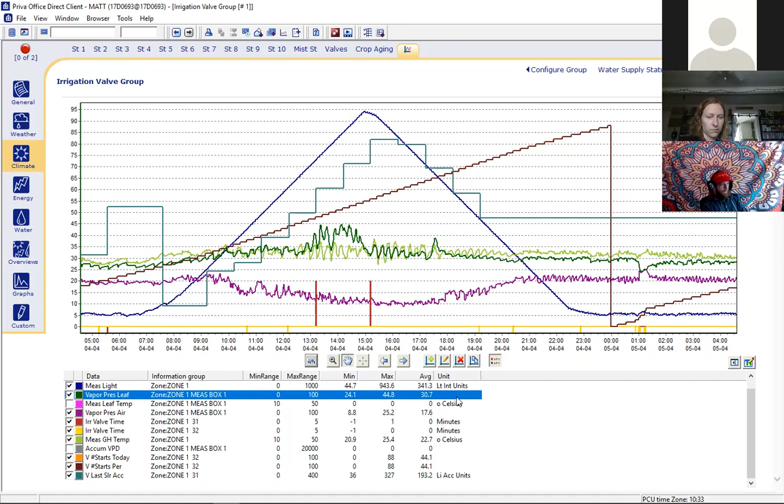Sure, okay. And here we're looking at, it doesn't say the unit on this, but it's millibars. It's a pressure. Okay. Measured greenhouse temperature would be in degrees Celsius. Okay, so the units up the y-axis is whatever we have highlighted on the graph.

Is there any way to change that? Pardon me? Is there any way to change that? Like, say I didn't want watts per meter squared, could I put it in PPF or something like that? No. Let me have a look here. Your weather sensor. So sunlight, solar sensor. Here, so we only have a certain amount of solar sensor types that we can set on the Priva system and on the weather station.

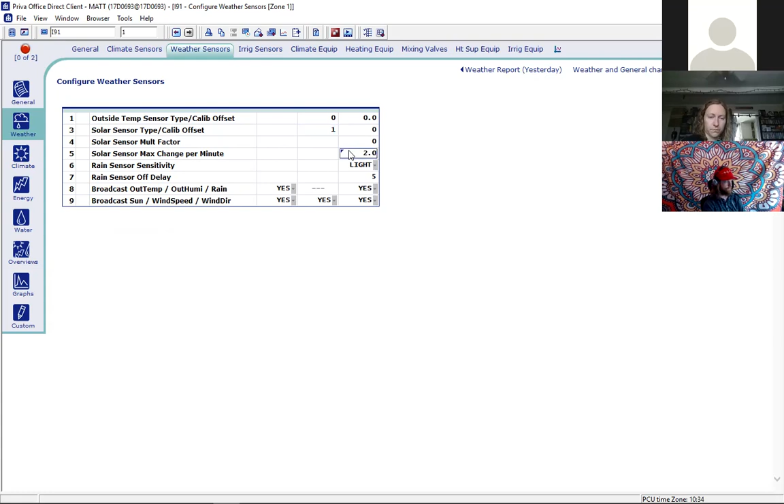The global or pyranometer is in watts per meter squared. There's a PAR sensor, which measures light in again, watts per meter squared, but in the PAR range, right? And there's a linear sensor, which will measure lux or lumens. Okay, that all makes sense. Thanks, Matt. Yeah, no problem.

Converting light units is not an easy thing. There's a lot of stuff on the web that will give you that information, but it's not very translatable. I don't even know what to equate it to. It doesn't translate very well. You can't convert it like a centimeter to inches. It's not as easy as that. It's kind of like French to English. When you're speaking direct English to French, it has a different meaning. The light units don't translate exactly the same.

But anyway, light units. So y-axis is whatever we have highlighted in the legend down here. Okay, the x-axis is always in time, and we change that time period with this little equalizer button down here, just to kind of go over and review that. We can change the interval type from hours to days to months to years. We can change the start time from when you want the graph to start reading and end.

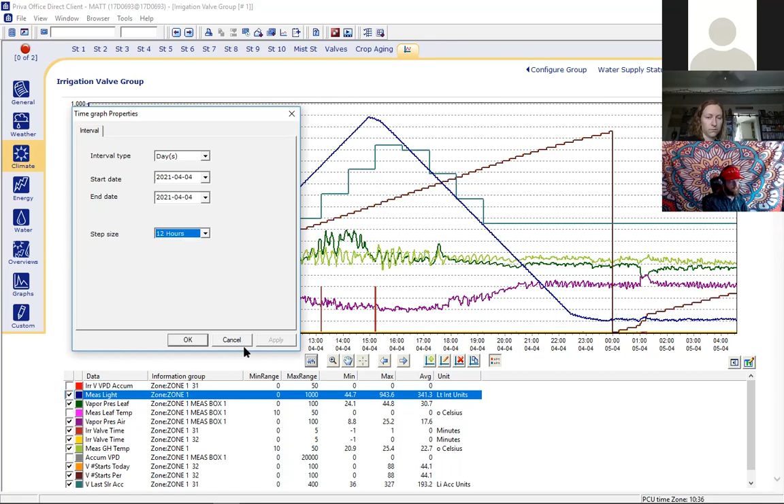You can have start dates and end dates, and we can have step sizes, which means this arrow here would push that graph forward in the amount of hours or days or weeks that you have set to move forward on. Okay, so that's how you manipulate the graph.

If we wanted to change or add any readings or status lines, we would click this plus button, and we can have a look at the amount of starts per day, the amount of starts per period. So these are all irrigation valve settings. We can look at just about anything, right? Anything that's traceable and any data that we track. A lot of stuff there.

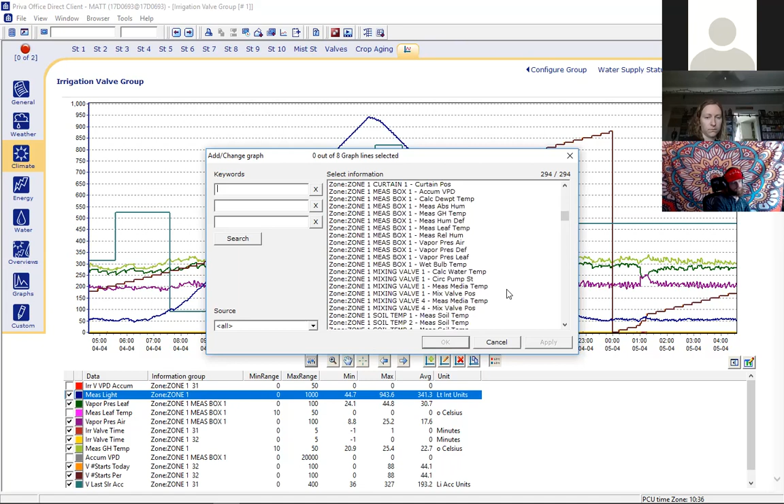Okay. Again, any questions on the graphs that you see here? Any questions on how to read the graphs? Translating information, usable information. Is there anything here that you question why we use graphs or how would we use this irrigation graph? You guys are all good. Okay, we'll move on then. All right.

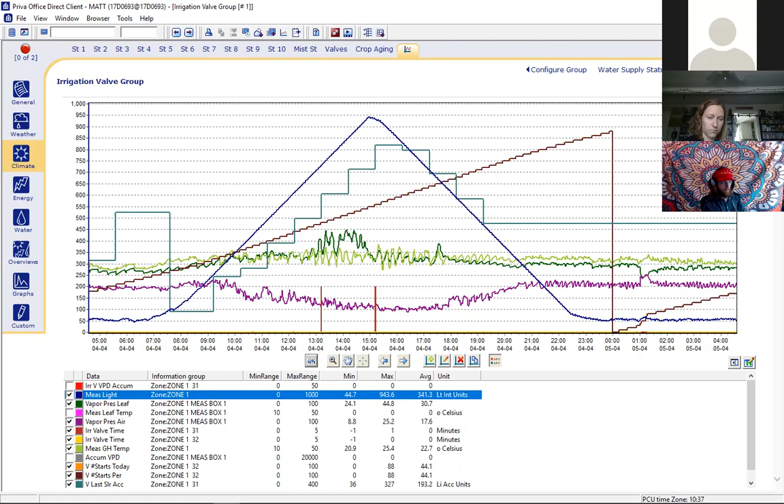Maybe we'll look at, let's look at the compass graph to see how different that is. I think I'm sharing. I wish Zoom would highlight the screen that I'm sharing. You guys are seeing the Priva operator now? Yeah. Thanks. So anyway, here's the graph that the Priva operator has in comparison.

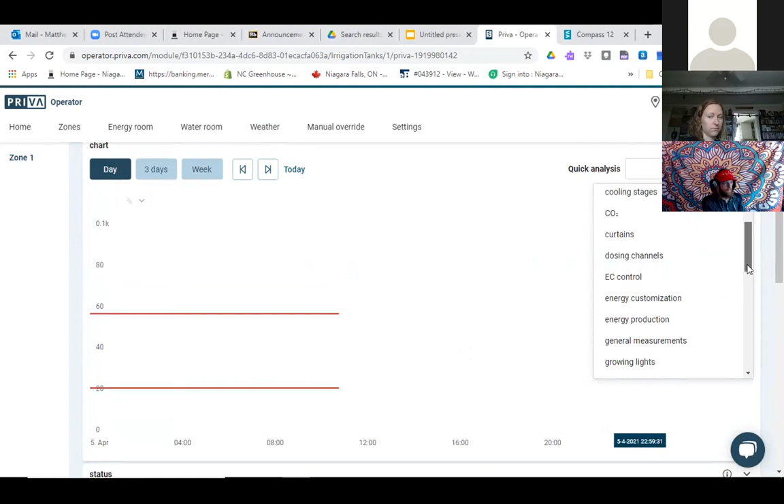Not as easy to manipulate, in my opinion. Let's look at... So it does track everything we need to. It's just not as easy to manipulate as the Priva Office Direct. I guess these are all...

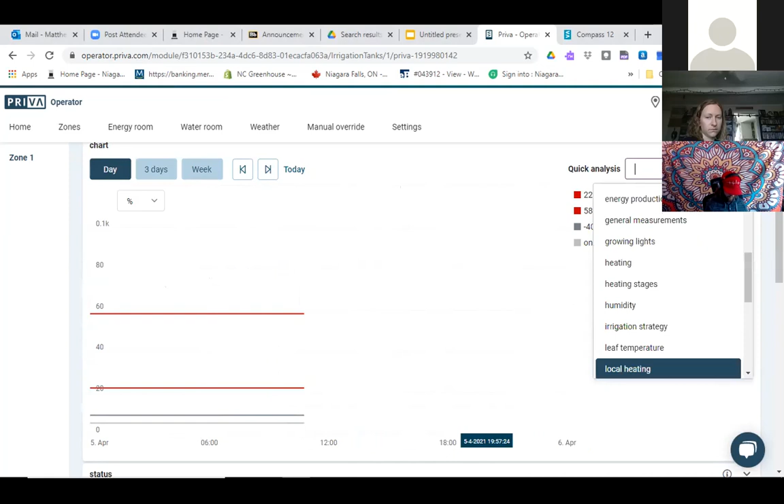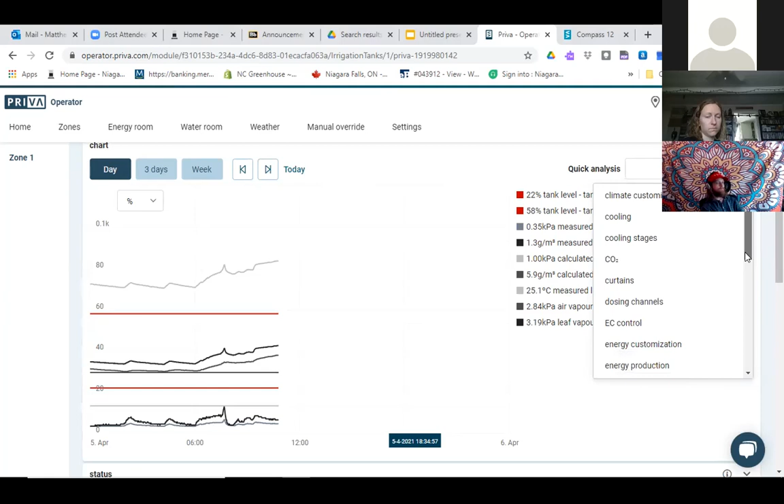I see how this works. So every drop down must have been pre-coded. Every drop down title down here has a collection of data points that it's tracking within the system. You must be able to set that somehow, and I really don't know.

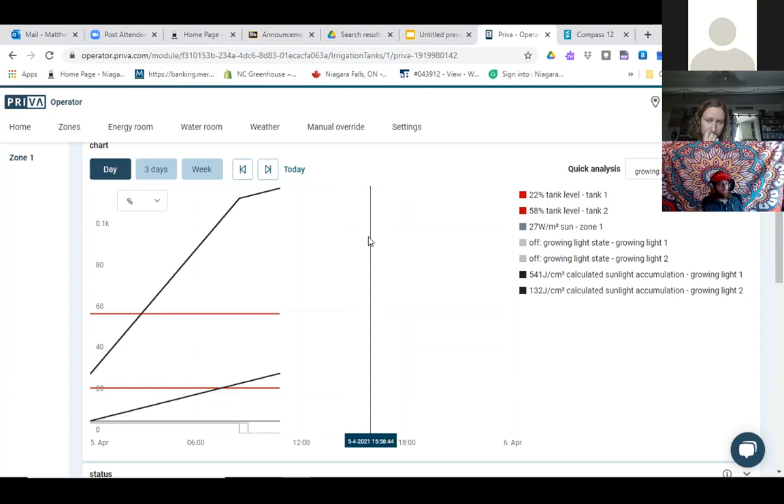So let's go over settings before I ramble on too much and put you guys off. So irrigation settings, we'll look at the Priva operator. It's all fairly similar to your climate settings. You have different strategies that you can choose from. Conditional means that you have triggers that you'll set up throughout the day, such as sunlight, humidity, VPD, wind, whatever.

We have daily, which is regardless of how sunny it is or any of the climate conditions, it's going to go off on a cycle that you tell it to. So you can have up to 30 cycles or 30 irrigation starts throughout the day. That's programmed daily. You can have multi-day. Instead of having Monday, Tuesday, Wednesday, days of the week, you can have your days set up, so every third day or so, you can have an irrigation start.

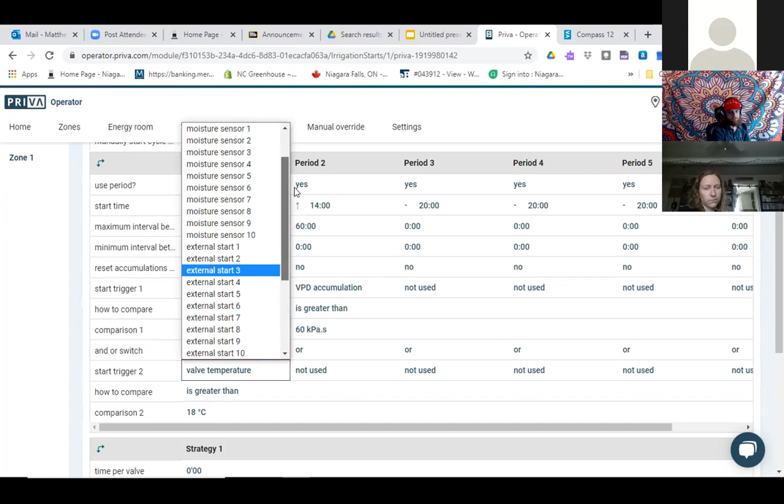Sunlight accumulation. Okay. So if we have our 1600 joules per centimeter squared, so when the sensor accumulates that much sunlight, irrigation start will happen, as long as we're within that 10-minute time frame. At 2 o'clock, that accumulation will reset and it'll start back down to 0.

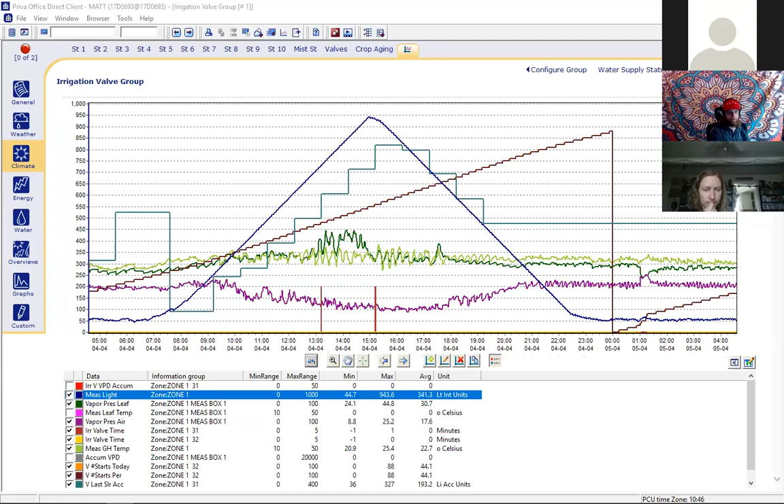Right? So when we look at our graph, it would look something like, talking heads, it'll look something like this, right? So our accumulation happens, our irrigation start, and then it drops, it resets. And then it goes back up again, and then it resets.

I want to confuse myself there.

So start triggers. This is why we want our irrigation to start. Okay, sunlight intensity. So we have 350 watts per meter squared. This sensor is more than likely on our weather station. So it's the amount of energy coming in. That's the sunlight intensity, right? Sunlight accumulation. So how much sunlight do we accumulate before the irrigation starts? VPD accumulation.

Moisture sensors. We can have moisture sensors throughout the crop. We do have one on the prop bench. It looks like a leaf, and basically it measures the resistance across that sensor, which when it's wet, the resistance is less. All of these sensors are based on electricity, so moisture sensors anyway.

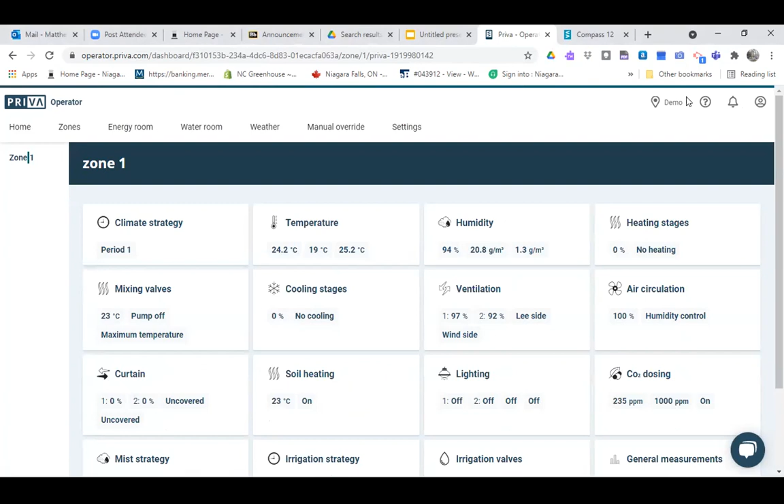Oops. Sorry. I froze it. Unbelievable. Technology, it's a beautiful thing. There we go. What the hell? It's not working. Unbelievable. We try it one more time. Yeah, we'll take a little bit of a right turn here.

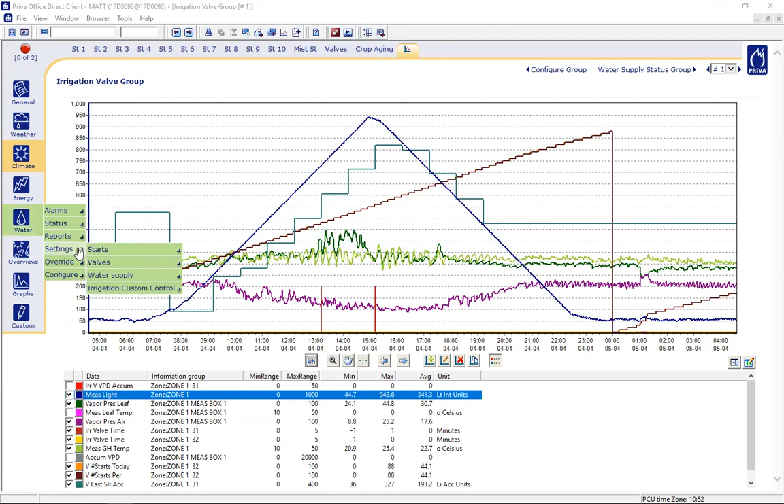It'll fall back. So anyway, we'll use the Priva Office Direct. So, settings, irrigation start one. I kind of like this program a little better because it's easier to jump back and forth. So my irrigation start times or start reasons or triggers, they're all in kind of one little area here. I guess I'm a little more used to it. But anyway, the same thing here. You can see all the same triggers you're able to use. It's identical, right?

So if light intensity is greater than 250 watts per meter squared, then our irrigation will go off every 60 minutes. So this is our actual settings in zone 1. At 6 a.m., every day, because I don't have it following sunrise, irrigation is going to be between 6 a.m. and 8 p.m.

Every hour, irrigation is going to go off for 20 seconds if these two conditions are met. If these two conditions are not met, then it'll be every 2 hours for 20 seconds. So I have the conditions as light intensity is greater than 250 watts per meter squared, and our valve temperature, which is the greenhouse temperature, is greater than 18 degrees.

Okay, so if one of these conditions are not met, the irrigation will be the maximum interval for 2 hours. If both of these conditions are met, then it'll go off every 60 minutes. Right? If I wanted one or the other, I can do that as well. So, and/or switch. It can be one or the other, or it has to be both. Okay, so you can latch them together.

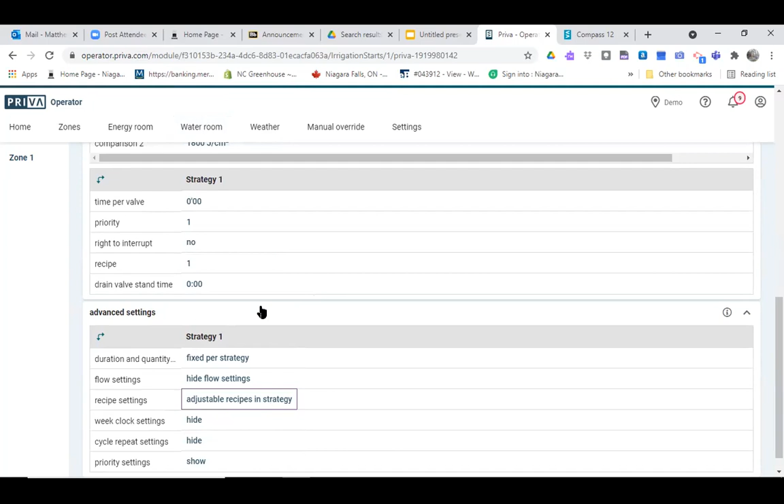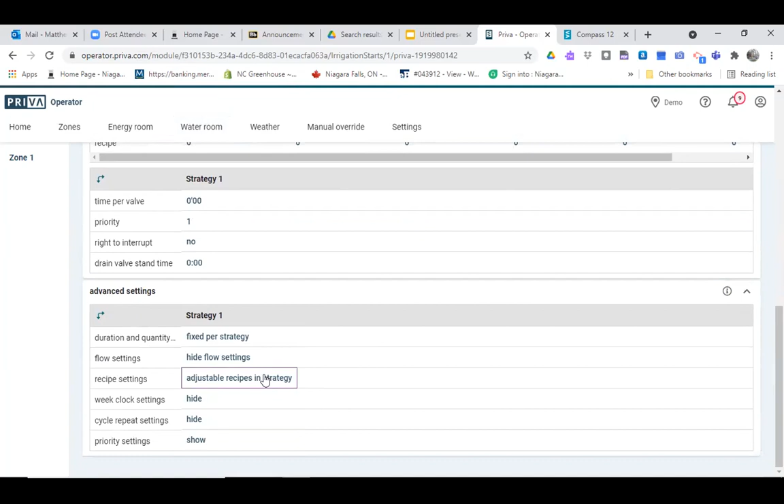There you go. The different strategies throughout the day. Okay, so like I said, as these programs evolve, we'll just have different toggles. It's not that the Priva operator can't do this, it's just a little more cumbersome. So there's just different triggers or different selections in the Priva operator, and that's what I mean by whatever you're comfortable with. All systems are very similar in what they do. It's just how you find the settings.

All right, so that's how you set up irrigation, right? So when you start a job, if you're ever able to use the computer control system, this is more than likely where you're going to spend a lot of your time when you're looking at irrigation. You're going to look at time between irrigation starts. You're going to look at irrigation triggers. And you're going to look at length of time that you want your irrigation to turn on.

These are things that I change on a regular basis. I changed them actually today on the prop bench. You notice things are too dry or too wet, you're going to make adjustments as you go. Okay, any questions on how to set up your valves? This is a specific valve within the greenhouse that you're setting up.

Nothing? You guys are all good with that? So you're saying you can walk into a greenhouse and set up some irrigation. I love it. Or at least be familiar and muddle your way through it, like we all do for everything we start with. It is pretty straightforward until you start looking at the screen. Cool.

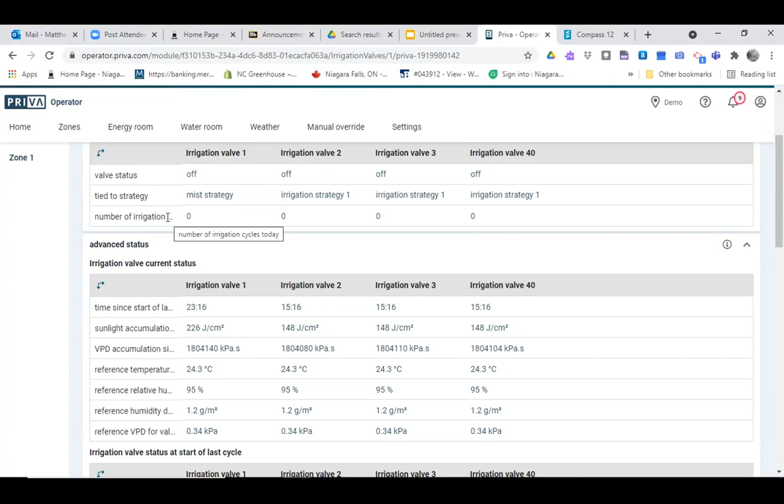So irrigation valve, for instance, is off. We're not irrigating. It's tied to a mist strategy, which is cooling the greenhouse or adding humidity to the greenhouse itself. Number of irrigation starts per period or cycles today, we have none. Time since last start, what the sunlight accumulation is. So these are all status. So this is what's happening with that valve, right? Walk through. It's kind of like looking at a graph, but one part of it.

Let's look at settings. So irrigation valve, we can have different strategies attached to these valves. If you don't want to use it, just leave it alone, no strategy. I have irrigation strategy 1. If we go back to the other page that we were on, that's what that means. So we were setting up that strategy. I don't know if we can use these anymore, these words. So slaves to irrigation valve, this valve is a slave to whatever. So if we wanted to be valve 2, then valve 2 would be controlling valve 1, if that makes any sense.

Right, so this is a way that we can reduce the amount of outputs in our motherboard, in our computer. Large greenhouses will have multiple solenoid valves or multiple irrigation valves in their greenhouse. You have a 100,000 square foot greenhouse. You're going to have 100 different bays, right? And each bay is going to have a solenoid, and likely you're going to have similar crops within that space, which you'll want these crops to be irrigated in a similar fashion.

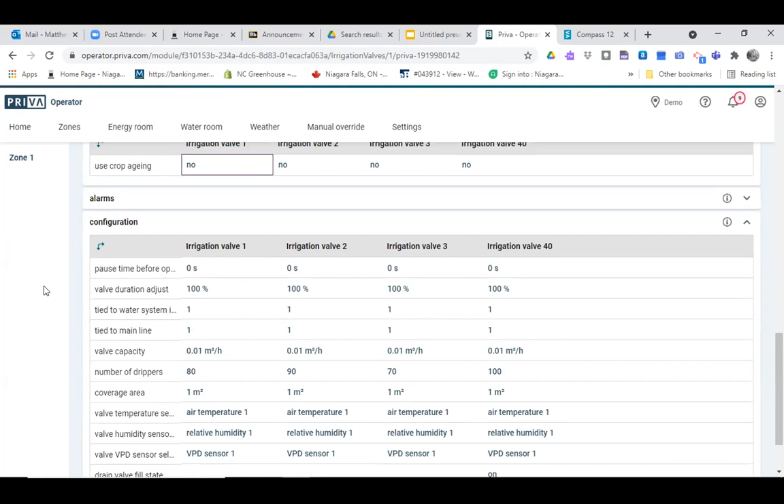So here's a few ways to manipulate your irrigation valves depending on what they are used for, right? So pause time before, so this is how to manipulate your equipment a little bit here. So each solenoid valve, you know, I assume you guys know how solenoid valves work. Your, what is that, greenhouse technical? You guys know how solenoid valves work? Chad knows. You guys comfortable with how solenoids work? They basically work on water pressure, right?

So anyway, if it takes a couple of seconds for your solenoid valve to turn on or off, you can set this time up here, right? So if it takes like 2 seconds, 3 seconds, 4 seconds, you can pause your irrigation time to kind of reset your solenoid valve.

Valve duration adjustment. So if you look back, your set point for your valve time is 1 minute. So your valve duration adjustment is 100%. It's going to go off for 1 minute. If I put this for, I'm going to keep it easy for me, 50%, that irrigation time is now adjusted down to 30 seconds. All right. So you might use this if you don't want to change your valve time on because it's tied to something else. You can adjust your duration.

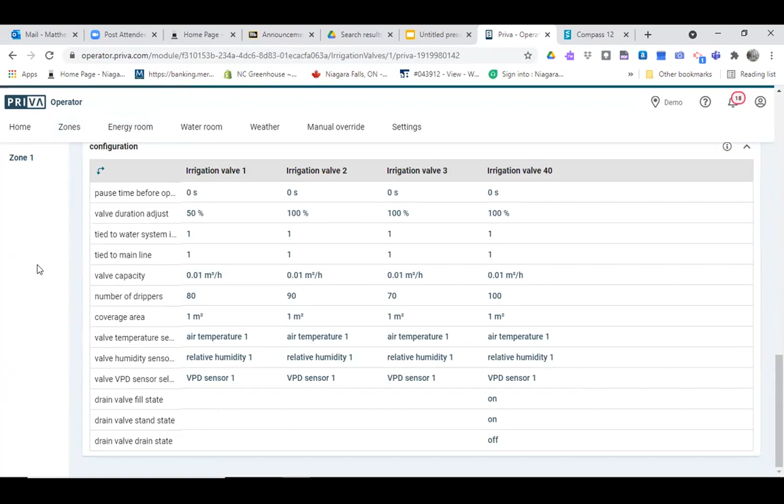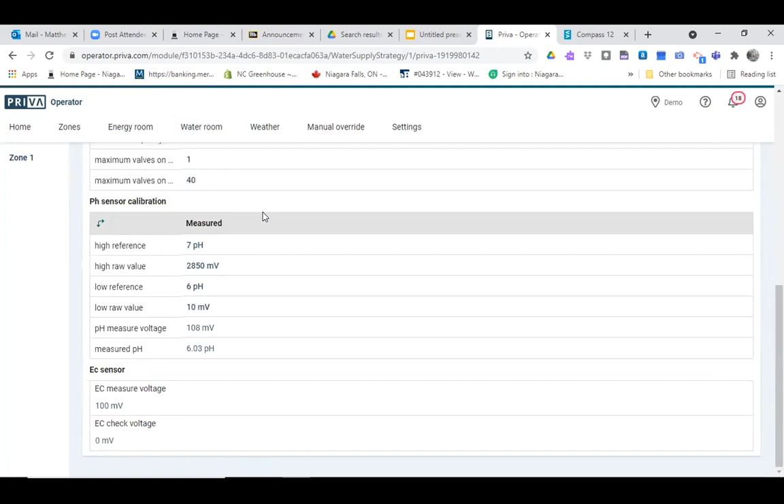So that is your irrigation configuration. All of that is your zone configuration, your valve configuration. That's how you set up your irrigation in your zones. Now we look at watering systems. And this is basically how you fill your tanks. Your water system is where you're getting your water from, so your tanks or your pressurized systems. Again, this is stuff that you'll probably configure once, so I'm not going to get into too much depth into configuration and settings for these tanks.

What we can look at is recipes and specific tanks. So your status: here's your pH and EC in that specific nutrient tank or watering system. In order to get an accurate reading, you really have to have moving water through your pipes, so you're going to have a loop of some sort. For those who have been in the cucumber house, believe it or not, we do have an EC pH loop just underneath the Dosatrons. It only works if the water is running, so it doesn't work all the time. Otherwise it's just measuring resting pH and EC, which could climb pretty high.

So anyway, here's where you set your recipes in your tanks. Your desired EC and your desired pH levels you set here. The sun intensity is a little tweak from the Priva Operator, which doesn't have this; there you basically set your desired EC and pH and you're good to go. In this setting for this tank, we have low sun intensity and high sun intensity. So say my desired EC in general is 2 millisiemens per centimeter.

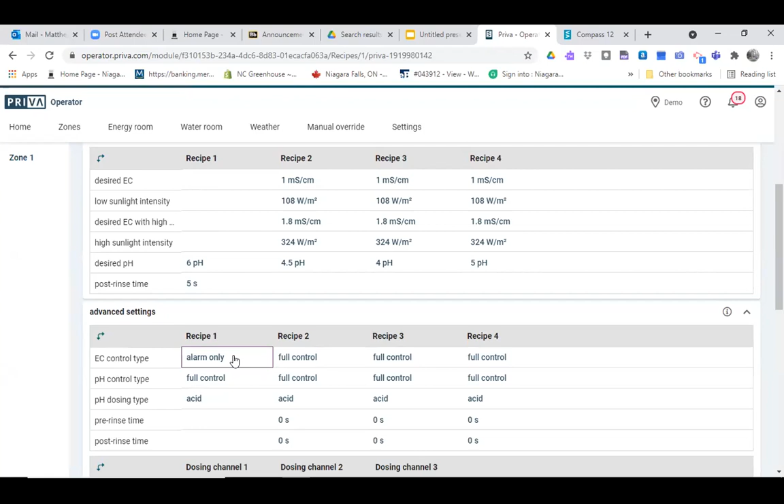Advanced settings, so we're looking at EC, full control. You'll more than likely keep it at full control. No control, so we don't have any EC or pH. Alarm only, so only if our EC is out of whack, we'll control that. So we want full control. We're going to keep that in full control.

pH dosing type. If we have acidic water, you can add bicarbonate. But we do not. We have high calcium in our water, so we have lots of bicarbonate. So we want to add acid to our system. Most places will. There are, like if you're getting water from a well, for instance... won't let me. Anyway, whatever.

So we can change our pH dosing type from acid to bicarbonate. Again, we can add another pre-rinse and a post-rinse. Use channel with recipe 1. So dosing channels.

Hey. Have you heard from Mike at all? Do you know exactly what he's doing? I don't know what Mike's doing. Neither does my class. You guys know what Mike's doing?

So dosing channels. You know, where do we want the fertilizer to come from? Do we have different types of fertilizer going into the system? This is where we can change that. So 100% nitrogen or 50% phosphorus. You know, whatever channels we have, we can pull from different tanks. All right.

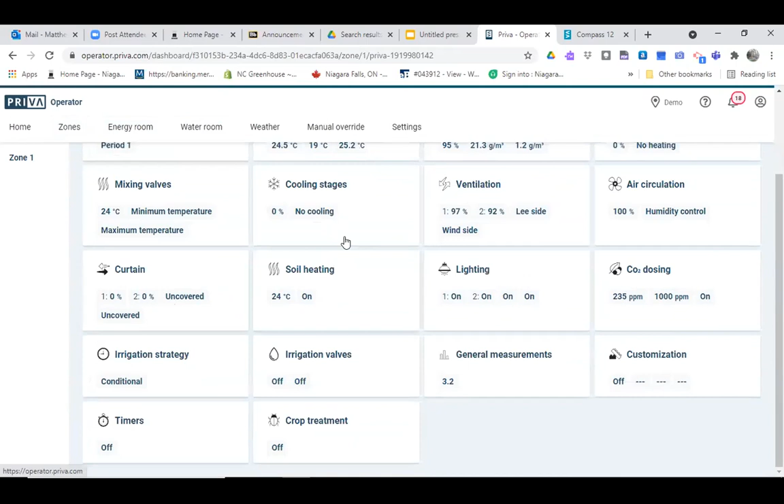Okay, lots to think about, lots to set up. But again, most of your time is going to be spent setting up the irrigation valves and your irrigation strategy. Again, some of your time is going to be spent setting up your nutrient recipes, and you're going to be tinkering with this on a regular basis, right? So I would suggest to get familiar with your nutrient recipes and your irrigation valves for irrigation settings.

Cool. I don't know what else to talk about with this. Is there anything else you guys want to go over? Are there any other questions you might have with irrigation? Is it what you were expecting? Is it like, wow, that's way more simple than I thought?

Would we be able to see, could you show us what adjustments you made in the prop house this morning and why you made them? Absolutely. Do that. Pretty cool. Thank you. Okay, so you guys can see the Priva office client now, I assume. If not, get on there and yell at me.

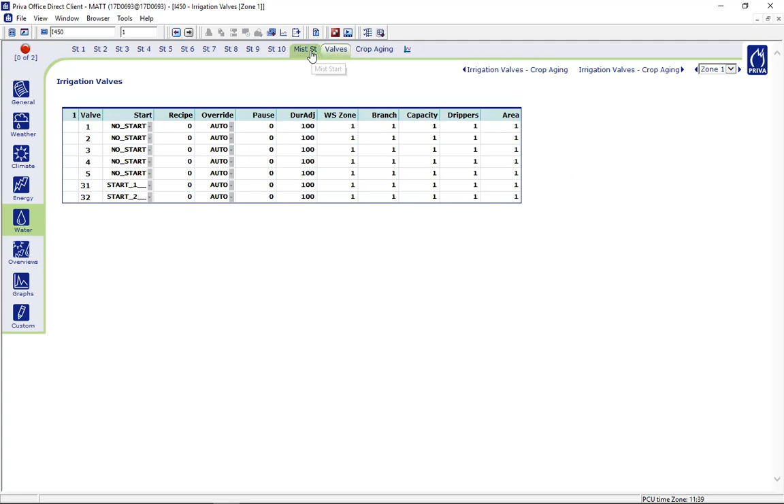So I had a mist setting set up on valve number 32. 32 is the far bench in the prop house. Okay. So the misting I use for propagation, it is largely used for fogging or for humidifying or cooling a greenhouse. But I like it because it's a little more control. It's going to go off based on timers rather than triggers.

Basically, when it's sunny out, it's going to water. And it's based off of humidity. Okay, so this is what I had it set for. And it's based in seconds, right? Another reason why I like Office Direct is because it shows you your units, whereas the Priva operator doesn't.

Anyway, so 1200 seconds. Don't let me do math. What is that? 20 minutes, right? For a low sun interval, and then 15 minutes for high sun interval. We'll just say that. 1200 divided by 60. Anyway, I don't want to do math.

Anyway, so here my mist duration is set for 10 seconds. My maximum light intensity is 300 watts per meter squared, and my minimum is 150 watts per meter squared. Above 150 watts per meter squared, it's going to go off every 1200 seconds. When it hits maximum light intensity, it's going to go off every 900 seconds, right? And it's going to go off for 10 seconds every 15 minutes.

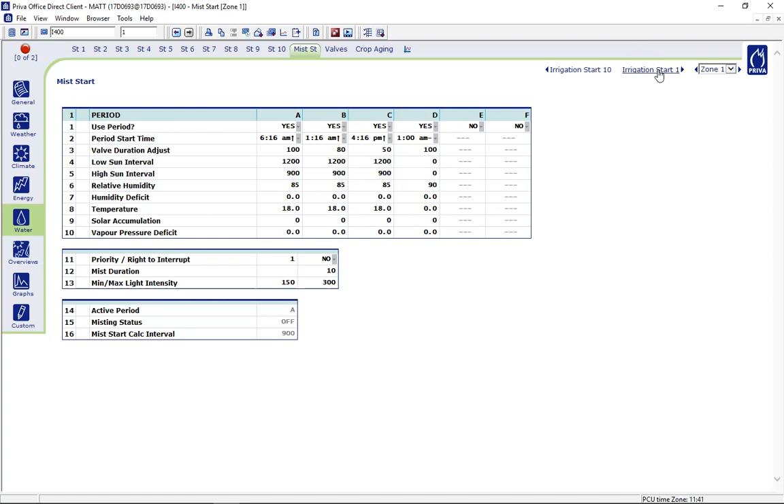As long as it's under 85% relative humidity and 18 degrees or over. So it's got to hit all of these in order for it to irrigate. We noticed that it was a little too wet, so we decided to change that. And I changed it to this setting here.

I want to change this, and this is something I didn't change. I want it to interrupt. I want my propagation to be first priority. I don't really care if it interrupts or not, because we don't have a lot of irrigation going off. I'm going to turn it on.

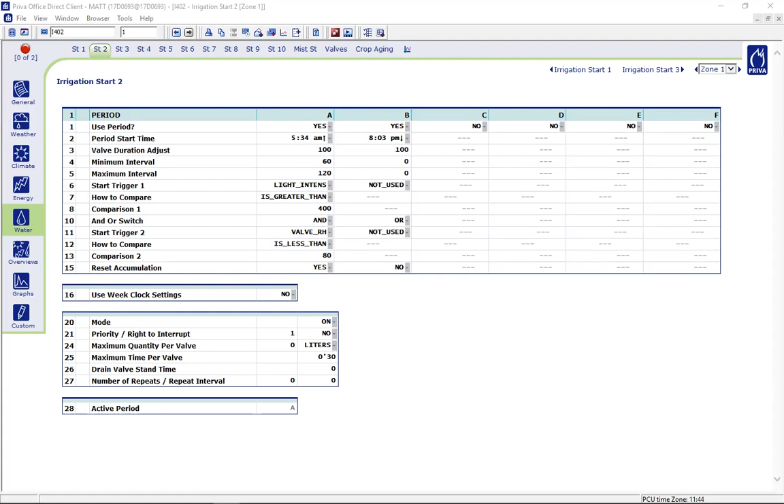All right, any other questions? Any other comments on irrigation? Anything we want to look at or go over, or review how to look at stuff? You guys all good? Did I lose everybody? Thumbs ups. Corey's got a thumbs up. Emily's got a thumbs up.

Awesome. All right, that's all I got then, guys, unless you want to sit here and chat or you have other unrelated questions. All right. What do you got, Chad? Who won the Final Four? I don't know. I didn't watch any. All right, thanks, Matt. All right, guys.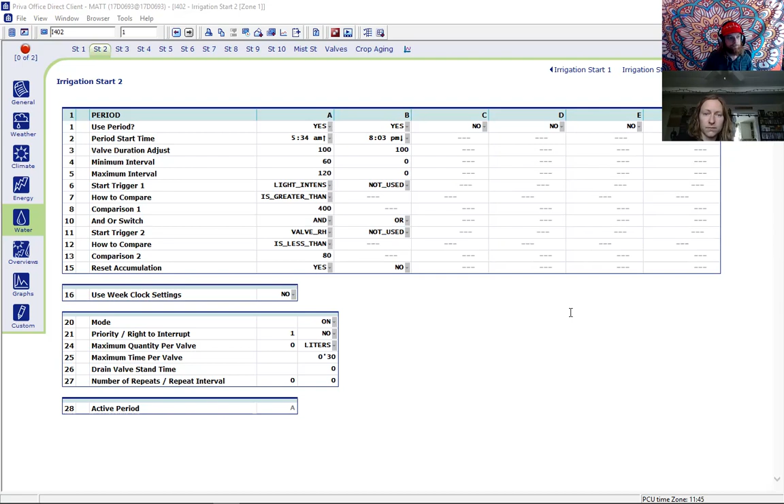Just kidding. For the hydrangea report, will you be posting a document with some kind of specifics, exact dates? So Chad, it's not really a report, so to speak. It's a how-to type of deal. How do you grow it? What things do you need to do in order to grow a successful crop? So whatever references you want to use. It's not specific to our crop, but you can make it specific to our crop if you wanted to.

You can use Derek's PowerPoints as reference. You can use websites as long as you reference those websites. And you can use anything we've chatted about and pictures that you've taken along the way, as detailed as you want to make it. No, it's not weighted. It's not going to count. Is it just in the greenhouse? So the midterm review is not going to count. Oh, I see what you mean.